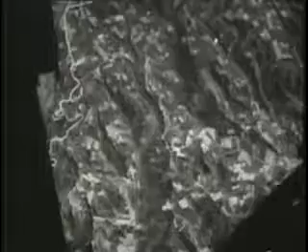Ballistics is an increasingly important and complex science that deals with the technical problems involved in hitting a given target in the field and getting the desired tactical results. Sometimes the ammunition we need to do a particular job can be carried to the target or placed in the target's path. Sometimes it can be dropped on the target. But in most cases, it has to be fired or propelled.

This involves the solution of three different kinds of problems which are covered by three closely related divisions of ballistics. Interior ballistics is concerned with the launching of the ammunition. Exterior ballistics is concerned with its behavior in flight. And terminal ballistics deals with the action of the ammunition at the target.

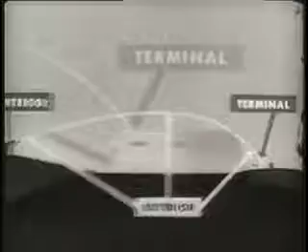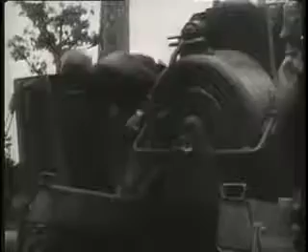Let's look first at the problems involved in launching our ammunition with launching devices that are complex, precision-made instruments, but which operate on a principle as simple as that employed in a pea shooter. When the pressure behind the projectile becomes strong enough, the projectile will move.

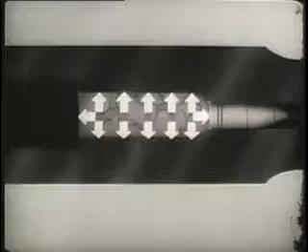In any gun, howitzer, mortar, or small arms weapon, the pressure behind the projectile is caused by the burning of the propelling charge or propellant, which forms a tremendous amount of gas in the chamber. This pressure is measured in thousands of pounds per square inch and is exerted equally on all surrounding surfaces, but with different results.

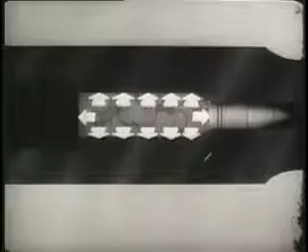The forces represented by the vertical arrows have no effect on the projectile. The pressure or force to the right is against the projectile, the most readily movable of the surrounding surfaces, and sends it out of the bore. At the same time, the force to the left is against the gun, which moves in recoil.

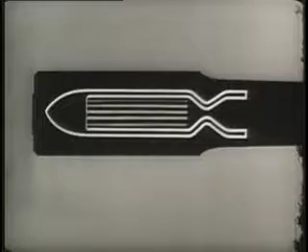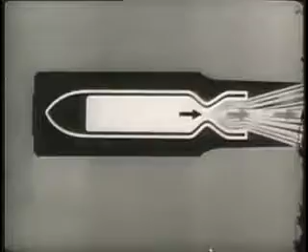By making a few changes in our simplified gun, we can see what happens when we launch a rocket. In effect, the lightweight rocket replaces the gun, and the lightweight gas replaces the projectile. The pressure inside, being equal in all directions, forces the gas out of the chamber at an extremely high velocity. At the same time, the pressure exerts an equal force to the left to propel the rocket.

Military rockets operate on exactly the same principle as the 4th of July variety. The bazooka also uses the rocket principle, while the recoilless rifle is a combination gun and rocket.

The propellant used in guns and most rockets is some form of nitrocellulose, commonly called powder. Modern powder is made in grains, the grains taking many different forms to get the various pressures needed in the many different modern weapons.

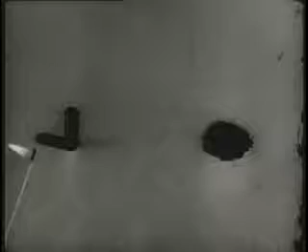Apart from chemical composition, grain size is the most important single factor in determining how rapidly a powder charge will burn. Just as wood shavings will burn more rapidly than the same weight of logs because there's more burning surface exposed, so will small grains burn more rapidly than a large grain of the same weight.

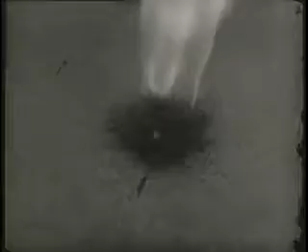When small, rapidly burning grains are used, the propelling effect is that of a sharp, sudden thrust. The effect we get from large grains is that of a sustained push.

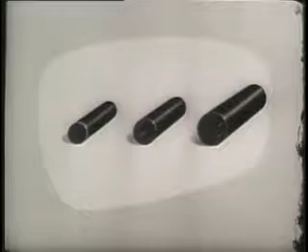But grain design also affects the rate of burning. In general, there are three types of grain: a large grain with 7 holes, a medium-sized grain with 1 hole, and a small solid grain called a degressive grain.

When ignited inside a gun, it burns fast and the pressure rises rapidly. As the burning surface decreases, pressure is generated at a slower rate. Here's a graph to show pressure action during burning.

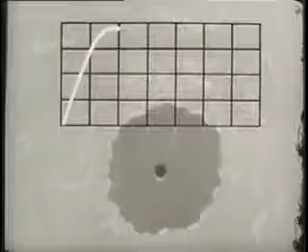The degressive grain produces a very high pressure quickly, but the movement of the projectile tends to let the pressure drop off rapidly. The medium-sized grain with a single hole is called a neutral grain.

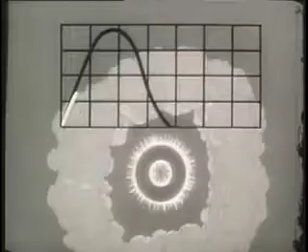In this form of grain, the burning is slower at first, but the burning surface remains constant during the burning period. Thus, the maximum pressure is not as high as with the degressive type, nor does the pressure drop off as sharply when the projectile moves.

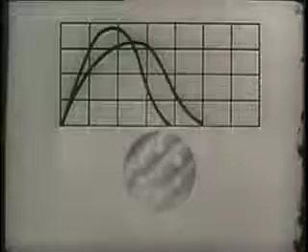The large grain with the 7 lengthwise holes is called a progressive grain. Here, the burning surface increases due to the number of holes. The pressure produced is not as high as with the others, but it falls off even less rapidly as the projectile moves. This grain is preferred in modern high-velocity weapons because it gives the projectile a steady push, produces higher muzzle velocities, and has a lower maximum pressure than is possible with other types of grains.

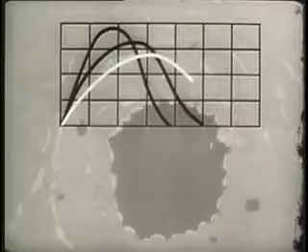There are many other grain designs, the fast-burning powder sheets for mortars, for example.

Neutral tube-shaped grains are used for certain types of rockets, as well as a variety of other kinds, each designed to provide the particular burning characteristics best suited to the weapon concerned.

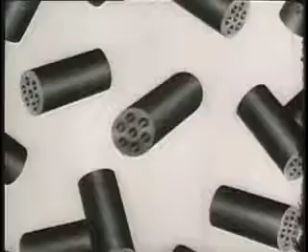Now let's see what kind of pressure action we need for different guns. When we burn a suitable charge of progressive grains, the pressure is moderate and sustained, sending the projectile out of the bore with a continuous push. This kind of pressure action is just what we need to get high velocity in long-barreled artillery.

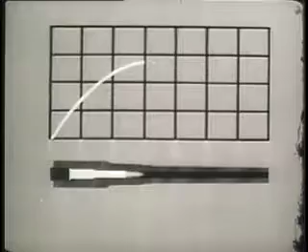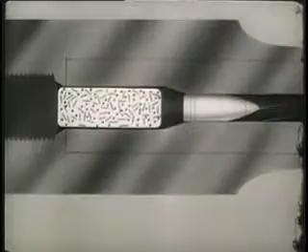But now we'll see what happens when we use the same charge in a short-barreled weapon. There's considerable muzzle flash, and the powder continues burning even after the projectile has left the bore, indicating that energy is being wasted. For a short-barreled weapon, a small digressive grain should be used. This builds up maximum pressure quickly to accelerate the projectile in a short space without undue burning afterward.

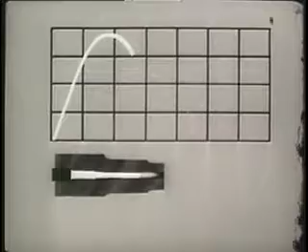This kind of pressure action is just what we want for low-velocity weapons, such as mortars or pistols. But if we use digressive grains in a long-barreled gun, there's a chance that the higher maximum pressure produced will blow it up.

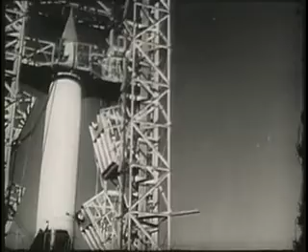For a rocket, we need a low, steady pressure, so we use a special neutral grain. The low pressure will not burst the lightweight rocket, yet give smooth acceleration. For the V2 and other large rockets, it's better to use certain liquid propellants, mixing them at a constant rate to assure constant burning.

In all cases, the propellant must suit a particular tactical purpose. That means providing the desired velocity with a minimum of smoke, flash, and wear on the weapon.

Interior ballistics is a highly complicated science, and what you've seen isn't the whole story by any means. But you do know what an important part pressure plays in launching the projectiles. You know something of the effects of grain size and design on gas pressure, and you know the relative burning action of the digressive and other types of grain.

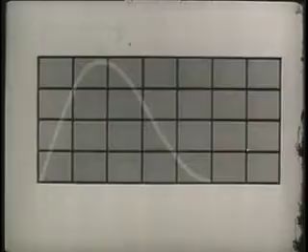In other words, you've got a good idea of why and how a projectile leaves home. Now you're ready to consider exterior ballistics. Exterior ballistics is concerned with the behavior of projectiles in flight.

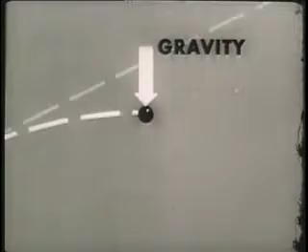If we could fire a cannonball influenced by no outside forces, it would continue forever in its original direction at its original velocity. If we add the force of gravity, the cannonball follows this sort of path or trajectory. By adding air resistance, we get this result, and the range is shortened still more.

To overcome air resistance and get greater range, we might streamline our cannonball, stretching it into a projectile. But look what happens—our projectile tumbles, and the range is shorter than ever.

We need something to stabilize our projectile in flight. One solution is to equip the projectile with fins. The use of fins solves the problem very effectively for mortars and some types of rockets, and the result is much greater range. Having the projectile spin is another solution to the tumbling problem.

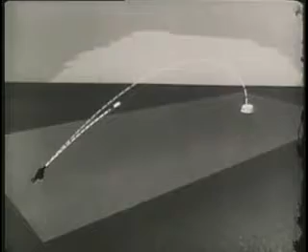This, however, causes the projectile to swerve from a straight course, drifting to one side according to the direction of the spin. That isn't as bad as it might seem, because we know it's going to happen and we allow for the drift in aiming.

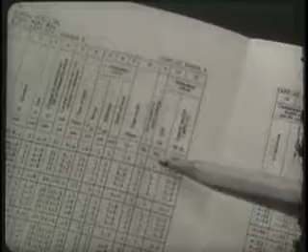To get the required spin, spiral grooves are cut in the bore of the gun and a soft rotating band put around the projectile. The band engages the grooves and the projectile rotates or spins.

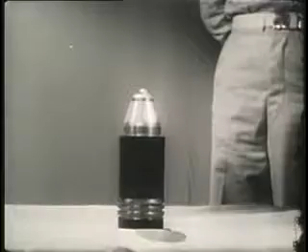Although there are many forces affecting the projectile, the most important to remember are gravity, which pulls the projectile down, and drag due to air resistance, which slows the projectile. There's nothing we can do about gravity, but we can overcome the effects of drag to some extent in the design of our projectiles—for instance, by the streamlined windshield on this one.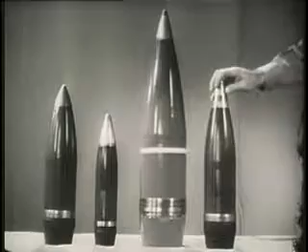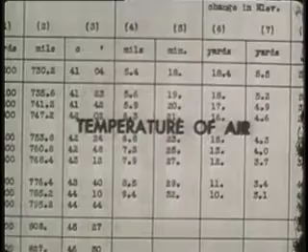Boat tailing, another method of streamlining, also helps to reduce drag. For long-range fire, we must consider, in addition to gravity and drag, the effects of varying density of the air, the temperature of the air, winds over the trajectory, and the rotation of the earth.

The basic problem of the exterior ballistician is always the same: to study, improve, and predict the behavior of projectiles or missiles in flight.

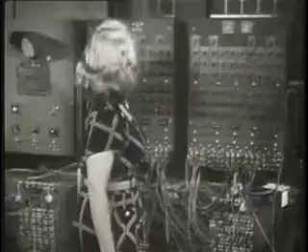Solution of the problem involves the knowledge of many complex forces, the application of many scientific principles, the use of many ingenious lightning-fast computing machines. The ultimate purpose of all this is to design projectiles and compute firing tables, both of such accuracy that our combat units get the maximum number of direct hits.

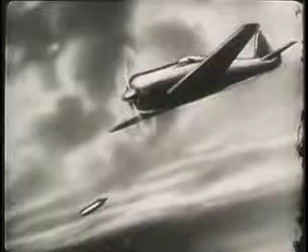And that is where terminal ballistics comes in. In terminal ballistics, we are concerned with what happens at the target, with the problem of getting the type of action we want for each different kind of target by the most economical, practicable means.

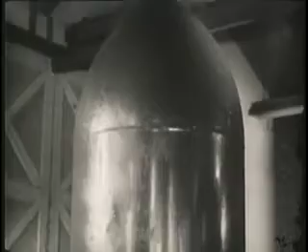Our projectiles, bombs, warheads, mines, grenades, and so forth are designed to provide different basic effects. By using a large amount of high explosive, we get an effect called blast, making use of violently expanding gases under tremendous pressure. Blast shatters brittle masonry or concrete. It will also twist and tear the metal construction of buildings and vehicles.

If penetration is the important thing, we can use a high-velocity projectile with a tough nose and little or no explosive. This sort of projectile will penetrate wood, stone, and up to several inches of steel.

By using certain proportions between the weight of the explosive and the thickness of the projectile, we can get fragmentation. Our projectile or bomb breaks up into hundreds of flying fragments. They penetrate like bullets, but leave more jagged, irregular holes. Fragments from bursting shells can do severe damage to personnel and to light structures, such as this plane.

Finally, by using incendiary projectiles or bomb clusters, we can start fires to cause great damage in a city, or in a structure or area where large quantities of supplies are stored. Generally speaking, each type of action will be effective against one particular type of target, but a combination will be even more effective. So our projectiles and bombs are usually designed with such a combination in mind.

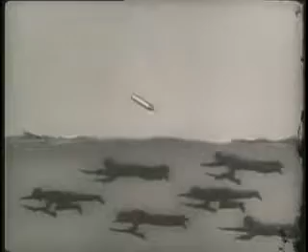Now, to time or control the action of the projectile at the target, we use different types of fuses. Some of our fuses act on impact, either instantly or after a short delay. Time fuses act at a set time after launching. Proximity fuses act when they get near the target.

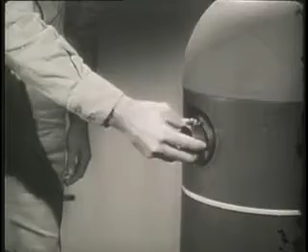Fuse location is also important. In certain cases, we get the best results by placing the fuse at the front end of the projectile. In other cases, it works better in the base. Bomb fuses are sometimes placed on the side, and in the larger bombs, more than one fuse is necessary.

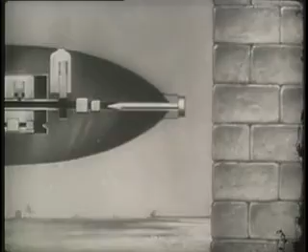The fuse type and fuse location determine to a large extent the type of action we get at the target. Now let's consider a typical application of these fundamentals of terminal ballistics in dealing with an enemy plane. Fragmentation is the effect we want.

Besides endangering personnel in the plane, flying fragments can wreck the engines, weaken structural members, and may penetrate the fuel tanks, generating enough heat to start a fire. The shell to do this particular job must carry enough high explosive to shatter the shell case and produce high-velocity fragments of the most effective size.

Now, what about the fuse for this job? We might use a time fuse, but our best bet will be a fuse of the proximity type, one that will go off automatically when it's near the target.

If we're dealing with an armored target or one of reinforced concrete, the first problem is to penetrate. So we need a tough-nosed, armor-piercing projectile that will be strong enough to withstand impact, one that will penetrate without breaking up.

Fragmentation is effective after penetration, so a small explosive charge is added. In this case, the fuse must be placed in the base of the projectile and should have a short delay action after impact. The combined effect of penetration and fragmentation gets both the pillbox and its occupant.

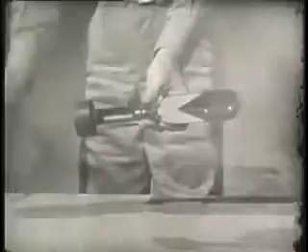If we don't have high velocity, we can get penetration by sharply focusing the force of the explosion. This is done by the proper shaping of the high explosive charge.

It's up to the terminal ballistician to determine from his experience and his experiments which combination of effects will be the most destructive for each kind of target.

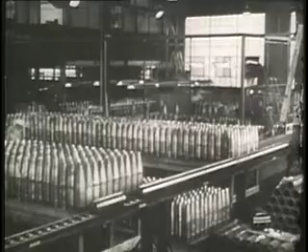And there are other elements to be considered by the terminal ballistician. In all cases, the ammunition he prescribes must be suitable for mass production. It must also be safe to handle, transport, and store. Technically, it must present no impossible problems in any phase of ballistics.

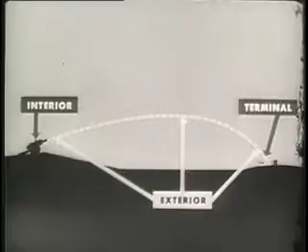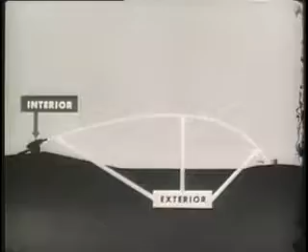The first concern of the interior ballistician is the safe and successful launching of the ammunition. The important point to the exterior ballistician is predicting its behavior in flight. By means of firing tables, this information is passed on to the appropriate using units. They in turn must launch the ammunition with full confidence that the terminal ballistician has provided it with the proper destructive potentialities at the target.